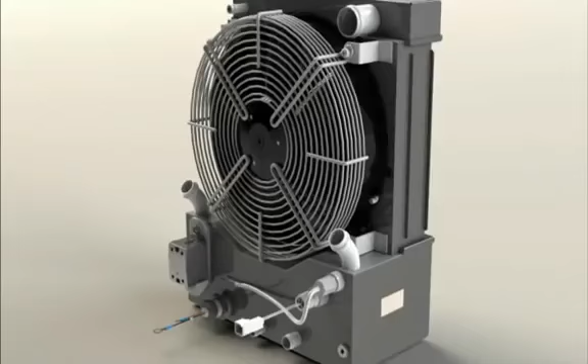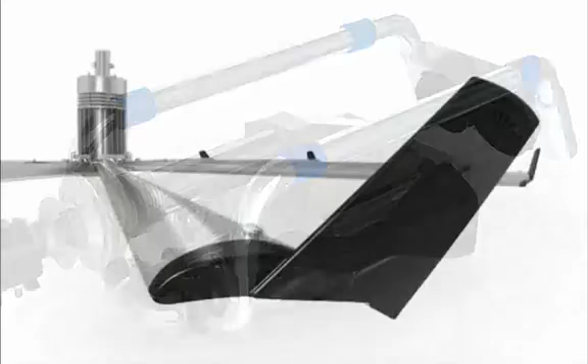When you stop and think about it, almost every design is impacted by flow to some extent. From wind loading to fluids to airflow inside components, understanding and accounting for flow can be an important part of a design. The challenge is to understand something you can't see or readily measure. Even if you can measure the effects of flow, it can involve expensive prototypes and testing.

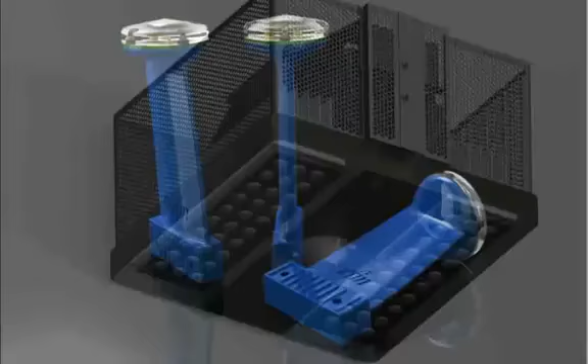SolidWorks Flow Simulation is an environment we can use to gain understanding of the impact of heat and flow on our design before we build it. So let's take a look at some examples where flow simulation can help in product design.

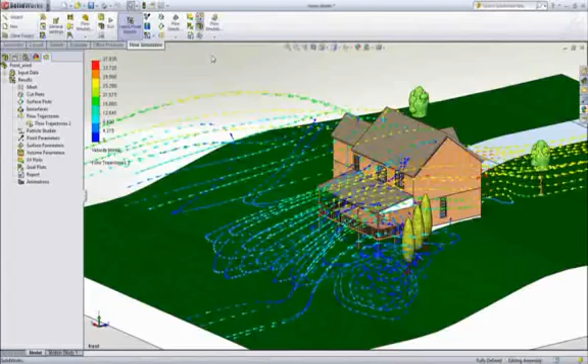When dealing with vehicles, buildings, or other structures, it is important to understand behavior of airflow and how it impacts aspects such as pressure loads, turbulence, and drag. What's so powerful about flow simulation is the ability to readily visualize what is taking place with far more power than any physical test. You are able to look at results anywhere and everywhere and in many different forms, from section slices through the design to flow streamlines that show the path of the fluid.

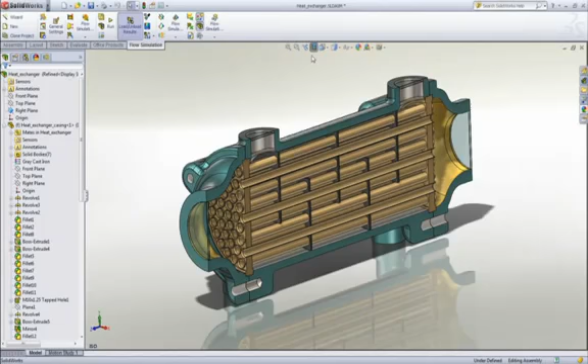SolidWorks Flow also supports the ability to export the loading on faces to simulation for structural analysis. Improving the performance of equipment can differentiate you from the competition. When it comes to equipment like pumps, turbo machinery, heat exchangers, and valves, SolidWorks Flow again provides incredible insight. With a wide cross-section of built-in gases, liquids, and solids, there is amazing depth to what you can analyze.

You can determine performance aspects such as pump efficiency, pressure drop or boost, flow uniformity, heat transfer, recirculation issues, just to name a few. The interactive results make it easy to look through the model.

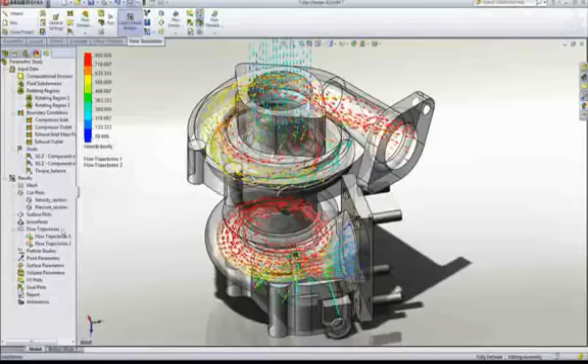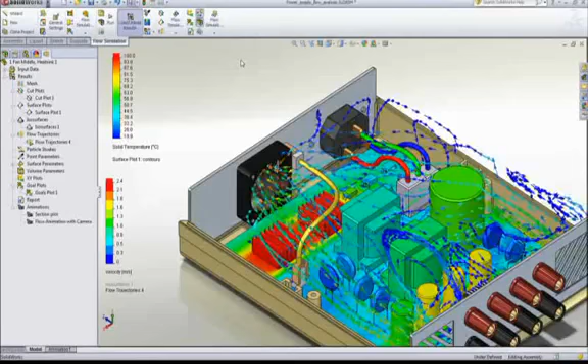Packaging electronics usually means confined spaces where overheating can become a concern. SolidWorks Flow allows you to verify you have sufficient cooling while giving you the ability to readily evaluate component placement to improve the effectiveness of the ventilation you do have. Built-in libraries for components such as integrated circuits, heat pipes, thermoelectric coolers, and fans not only reduce the effort to test your design, but also ensure accurate representation.

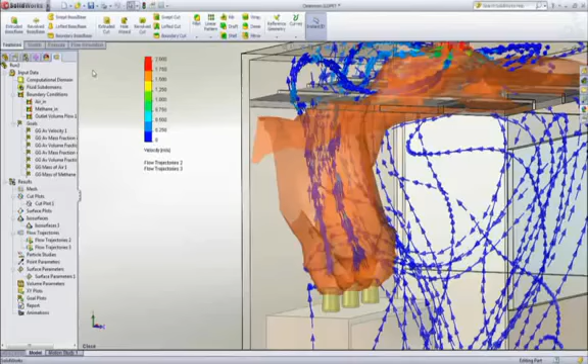When it comes to developing clean rooms, offices, or the ventilation in any facility, it is imperative that there is adequate airflow for workers or for handling fumes safely. SolidWorks Flow provides tools tailored to assisting in the sizing and positioning of ventilation systems. You can investigate aspects such as the effectiveness of solar radiation, measure the comfort level for occupants based on industry standards, or even the concentration of various gases in the environment.

We've covered a wide cross-section of applications where SolidWorks Flow can aid in not only checking that your design will perform, but also that it is the best design for the task.